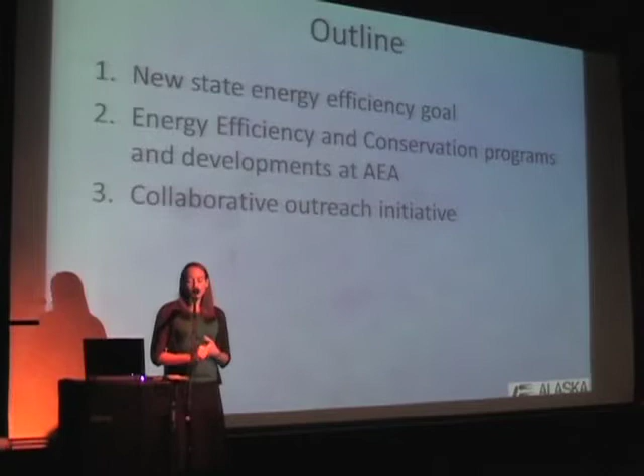So just a couple of things I'm going to go over. My presentation is very short, I promise I'm going to try not to bore you. I want to talk briefly about the new state energy efficiency goal, some of the energy efficiency and conservation programs and developments at AEA, and a new collaborative outreach initiative that we're actually right in the middle of right now.

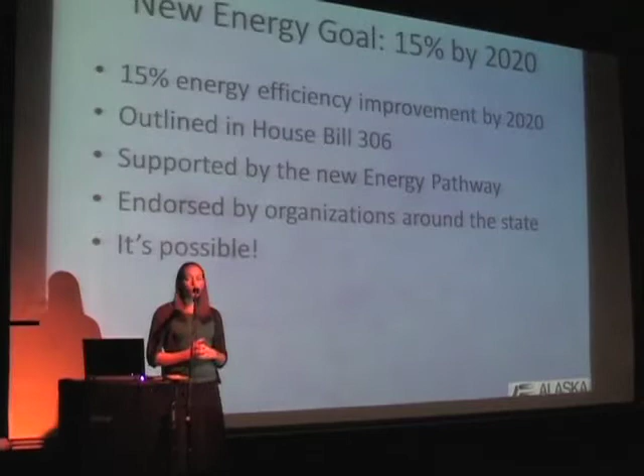As you probably are aware, this past spring our legislature passed a new goal in House Bill 306 to improve the state of energy efficiency in Alaska by 15% in the next 10 years. The governor signed this into law, and it's been supported by a document you might be familiar with called the Energy Pathway. This is something our executive director, Steve Haagenson, and a whole slew of people put together, and if you're interested in the pathway, you can find it on the AEA website.

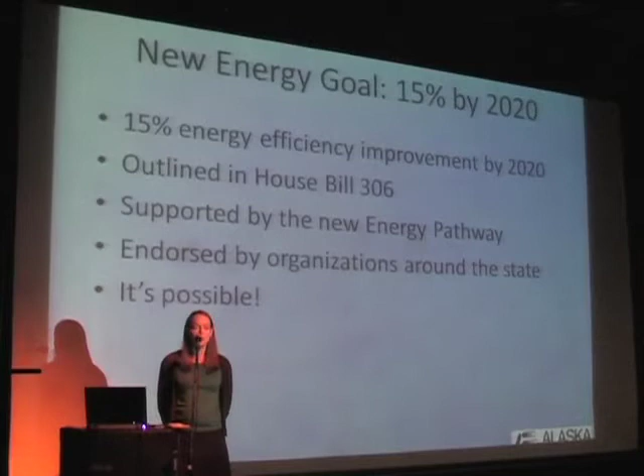And now the goal has been endorsed by organizations all around the state through a group called the Energy Efficiency and Conservation Working Group. We all believe it is possible to make this improvement, to reach this 15% goal, and if anything, that might be an understatement, that we could actually do better than that.

The first set of programs I'll mention are the Small City Energy Efficiency and Conservation Block Grants and the Village Energy Efficiency Program. These are sister programs, very similar, but they come from different sources of money, so they're separate. The EECBG program serves about 97 small cities in Alaska, and the VEEP program has 21 villages in the state. Combined, that's about $8 million. They're both stimulus-funded programs, and the intention is to weatherize and retrofit public buildings in these communities to help lower the cost of energy.

Before I move on to some of the other programs, I'll mention one I forgot to put a slide in for. You might have heard of the Whole Village Retrofit program. That was a collaborative effort by a long list of organizations, including AEA. I don't want to go into that now, the list is too long and I don't know if I'd remember everybody. But that was a pilot project done in the community of Nightmute. It was very successful, and we'll be doing three more communities next year: Emmonak, Alakanuk, and Fort Yukon. We don't have a lot of information about those yet because the decision about where to do the next round was just made recently.

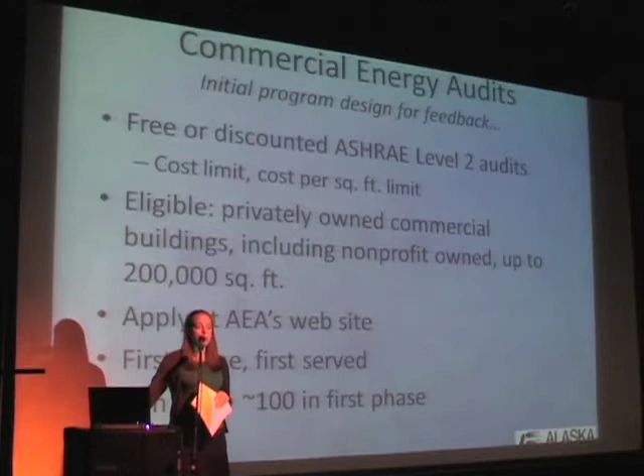So if that's something you're interested in, keep your eyes on our website. I'm guessing it'll be pretty close to the end of the year that it actually comes out. One of the things we'll be looking for is getting the data back, so we can use that as part of a collaborative effort to gather data about energy use in the state and track that, again looking toward this 15% goal.

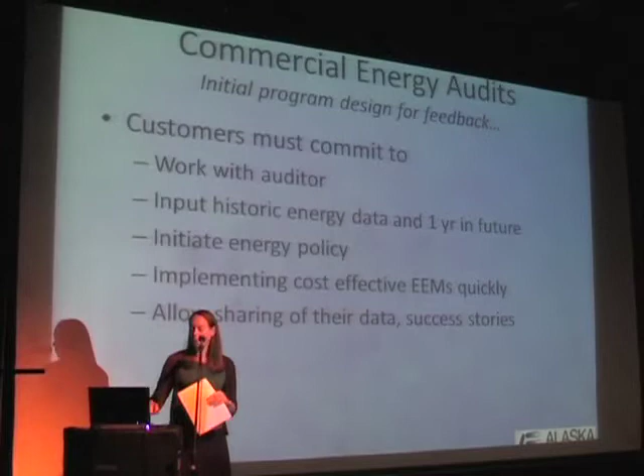Another program that's pretty interesting at AEA is a pilot project for industrial energy efficiency, just within the seafood processing plant sector. So it's a pretty small niche, but it has proven to be successful. I think there have been two seafood processing plants audited so far, both in Cordova, and the community is proud of what's been done. We're very optimistic this could turn into something bigger eventually, but it's just nice that we have something in the industrial sector.

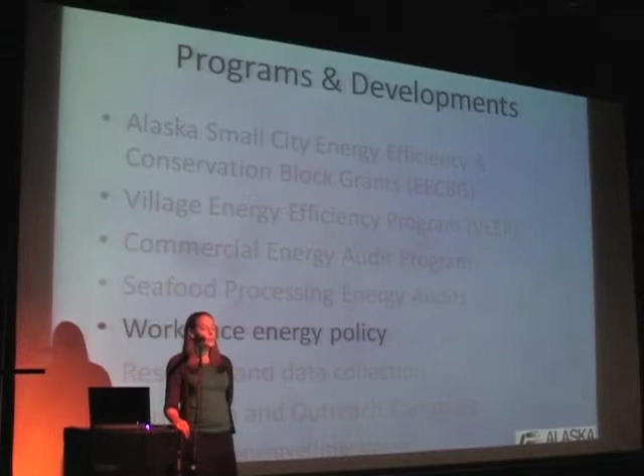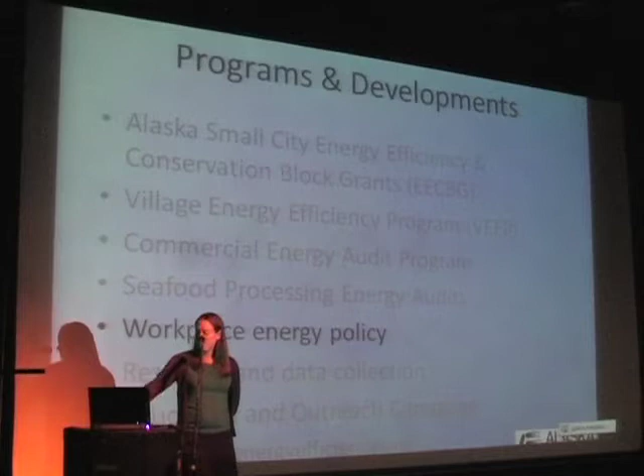The workplace energy stuff doesn't really fit in with home weatherization, but if you care about energy efficiency in your home, maybe you'd like to do something in your workplace. This is something we've done at AEA. We have a very, very inefficient building in Anchorage, and...

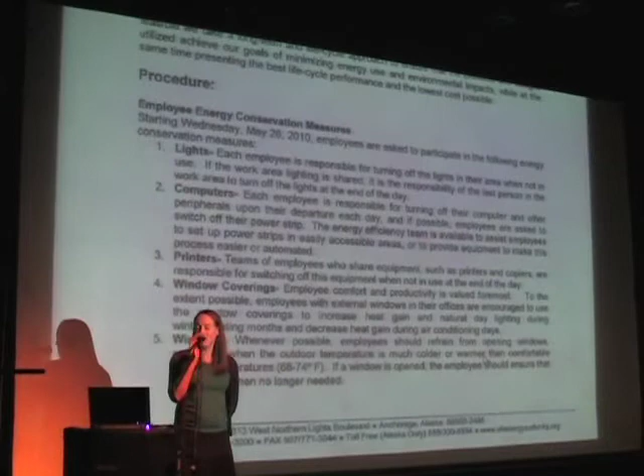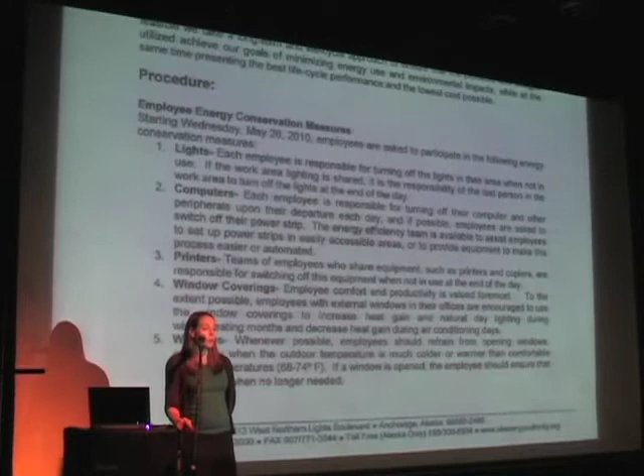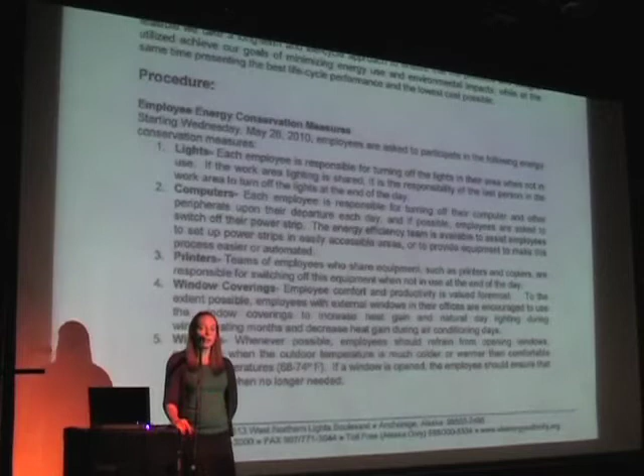Okay, we're back on track. We implemented a building-wide energy policy right after the fiscal year, and it's really straightforward, a bunch of the no-brainer measures you'd expect people to take anyway, but most of us are lazy and just don't do, things like turning off our computers or putting them on power strips we can flip off at the end of the night, and putting our copy machines on timers.

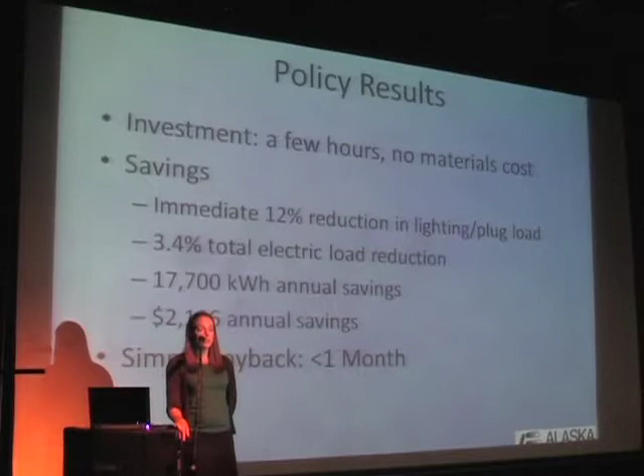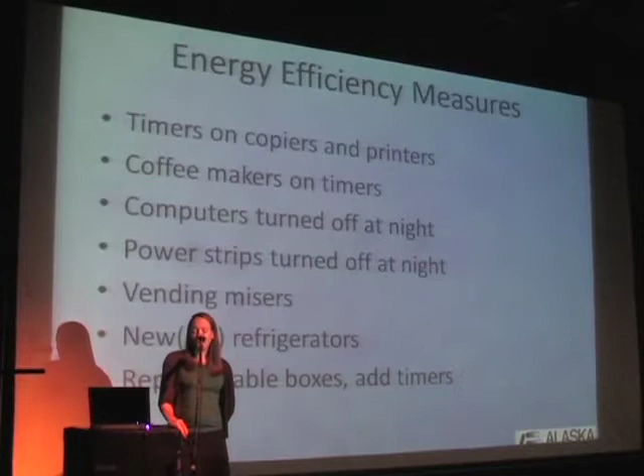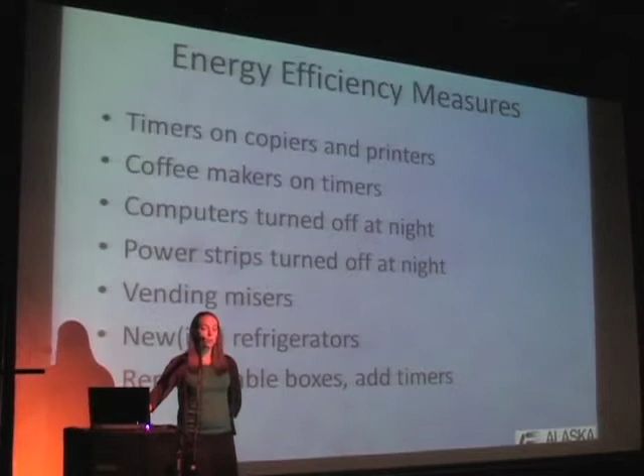The policy results, which we have a map of, showed a really simple payback and some pretty significant annual savings. Looking at the different measures taken over the course of the summer and into fall, like power strips turned off at night, computers turned off, and putting our coffee makers on timers, that was a surprising one, most of those industrial coffee makers are on 24/7. We also looked at some of the other refrigerators, making sure we don't have completely archaic ones, we have the newest ones possible. We're saving a lot of money, and this is something anybody can do in your business.

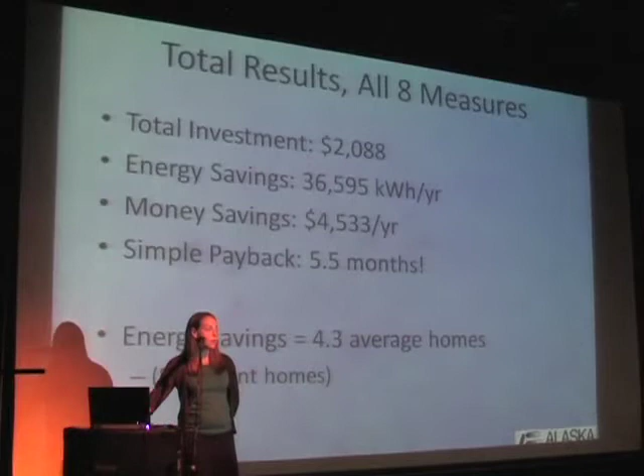I know that businesses care about the bottom line. If you're interested in this, you can find it on our website, and it would be a very simple template to use in your workplace if you're interested.

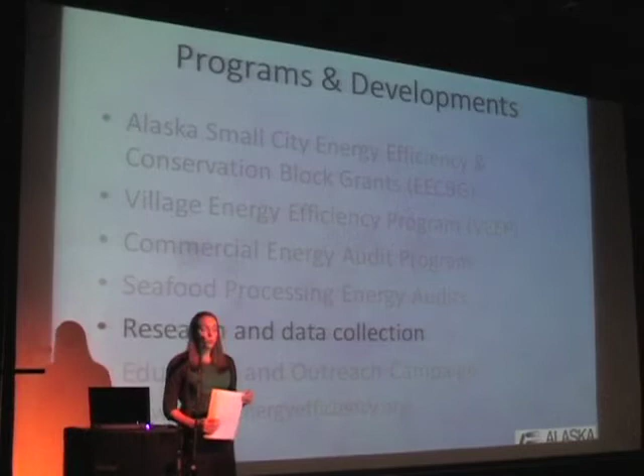So one more piece - this is all new things that will be happening soon. Research and data collection, this is actually part of a grant that AEA wrote on behalf of this statewide stakeholders group earlier in the summer, and we just recently found out we had received it. It'll fund a lot of what I'd call critical information gaps, like a statewide end-use data study. If we want to work toward a 15% goal, it'd be great to know exactly where we are now, so we can measure progress as we move forward.

It will fund a statewide needs assessment for improving energy efficiency, and compare that to a study of best practices for energy efficiency education and outreach outside Alaska, so we can have a more targeted, effective strategy for reaching the public, which I think is great. And then revisiting a policy and program recommendations report done two years ago that's been used a lot, particularly by our legislature. Most of the legislation passed this spring in Senate Bill 220 and House Bill 306 came from recommendations initially in the first version of this report, so now it's time to do another one.

And finally, my favorite part, the education and outreach campaign at AEA, including a new website. This is where it might tie in with what you came here tonight to hear about. This Energy Efficiency and Conservation Working Group is a large and growing body of over 30 organizations around the state, including ACEP, AHFC, CCHRC, and a long list of acronyms I won't bore you with now. We came together to coordinate our efforts and agreed that this 15% goal is achievable, and it will work better for all of us if we do it together.

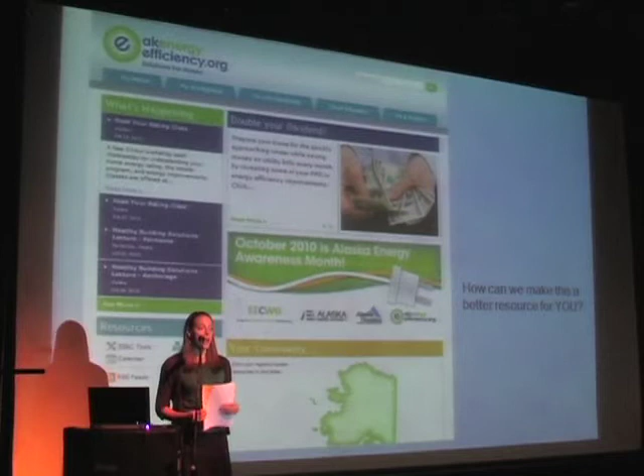And finally, this brings us to one of the reasons we might be here tonight, and that's because October is Energy Awareness Month. Here's a quick look at our website. Again, if you haven't been here before, or you have and haven't given it much thought, please go to it when you have a chance and send us an email. Let me know what you think needs to be added, or if you have any positive or negative feedback. We really want this to be a place that Alaskans can use as a first point of contact into the universe of energy efficiency in Alaska.

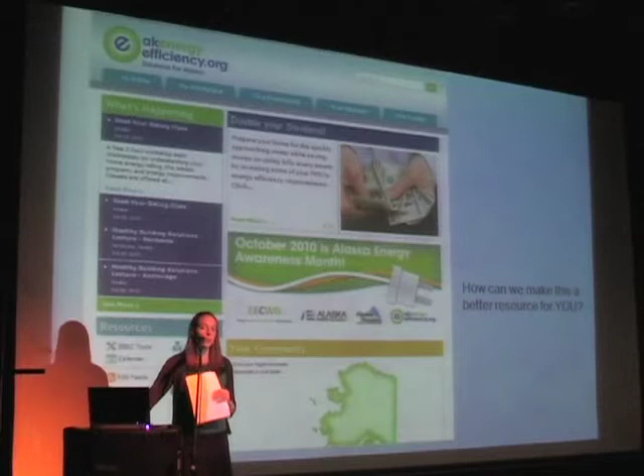It's a heavily link-based site, so odds are if you start here, you'll end up somewhere else, but if you keep returning here, you'll never run out of places to go to find what you need.

For Energy Awareness Month, even though it's getting toward the end of October, if you're interested in a poster for your workplace, your kid's school, or tip sheets you can use or pass on to a friend, neighbor, or coworker, there's a bunch by the door. Please feel free to take as many as you like on the way out.

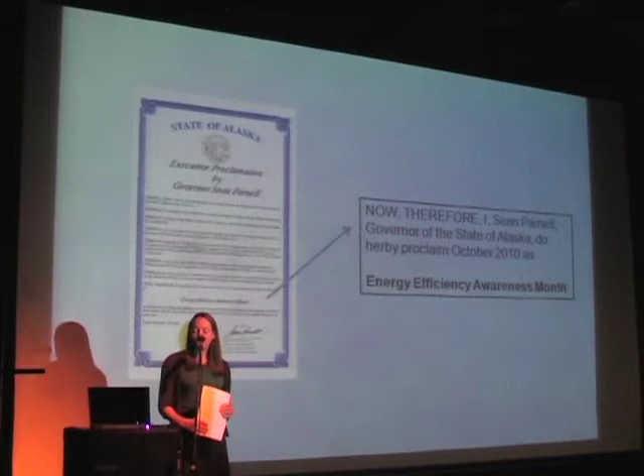And this is from the proclamation. The governor didn't make a big deal about this, but he did indeed sign a proclamation making October 2010 Alaska Energy Efficiency Awareness Month.

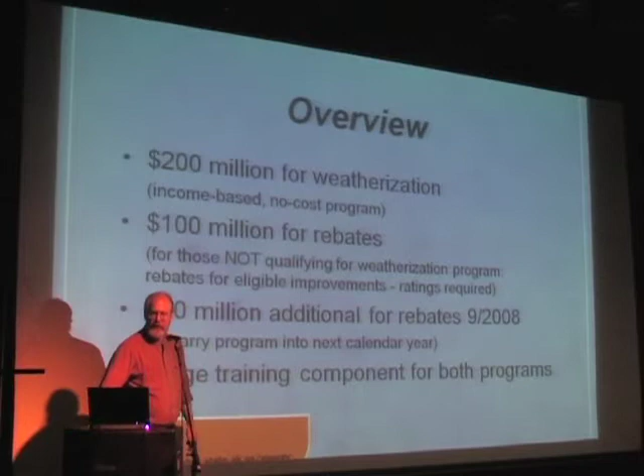We've been working the last couple of years rather busily on some weatherization and home energy rebate programs. I'll give a quick update. The weatherization program got funded a couple of years ago at $200 million, and then $100 million for rebates. There was an additional $60 million tied in September of 2008. To date, most of that money has been encumbered, though not all spent. There's still some money left, but most of it has been committed.

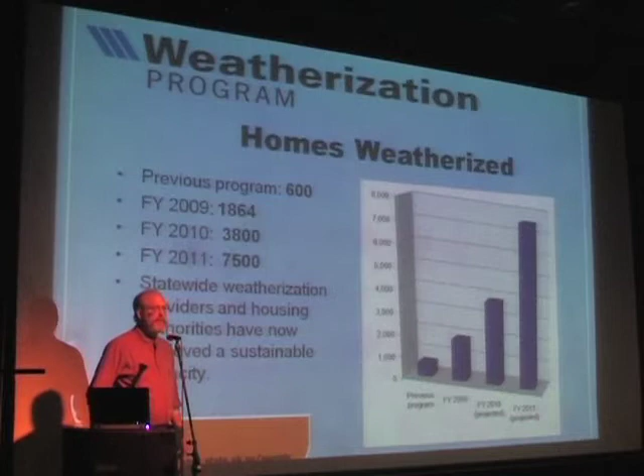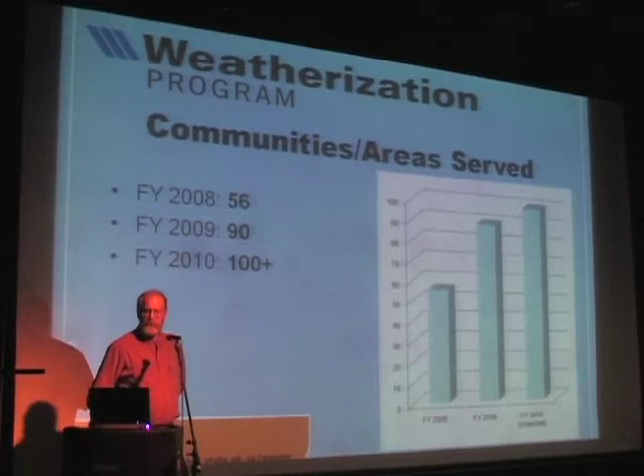The weatherization program is a low-income program that provides grants for low-income people in Alaska to weatherize their homes. In previous years it averaged about 600 homes per year. In FY 2009 there were 1,864, with 3,800 projected this year, and 7,500 next year. We've reached over 100 communities in the last 2 years, where previously we used to do about 56 communities. So that's increased pretty dramatically.

On the rebate side, all of the funds have been fully encumbered. As you may be aware, the rebate program gives you an as-is energy rating, then you do the work from the list of improvements offered, and then you get a post-energy rating. You have 18 months to do the work and get your post rating and paperwork turned in for the rebate. That money has been fully encumbered, but only about 65% of people who got an as-is rating are actually following through and getting a post rating. So that 35% who haven't followed through, that money is returning to the pot and rolling over.

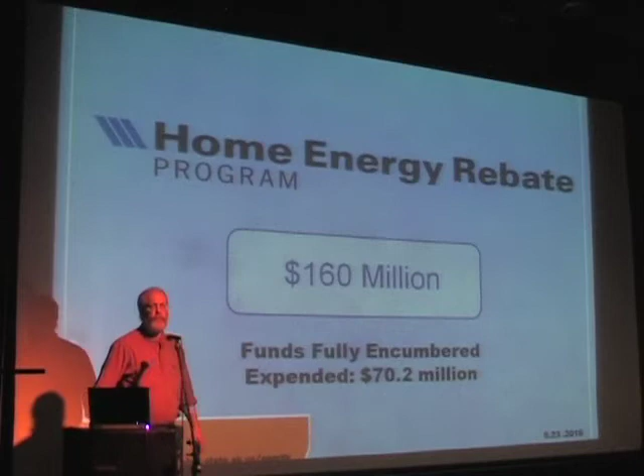We're still releasing about 400 names per month to get the home energy rebate as-is rating done. On the rating side, there have been just under 9,000 rebates paid so far, averaging just over $6,200 a month, with about a 63% participation rate.

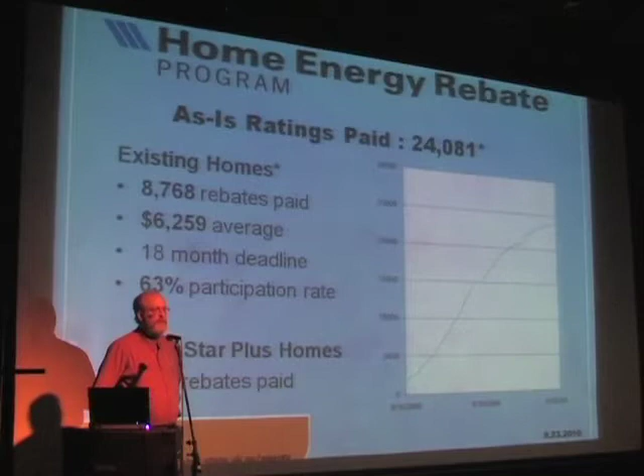There have been 834 new 5-star plus homes built in the last 2 years. The number of raters has increased fairly dramatically. At one point we were a little short on raters, and in late 2008, early 2009, there was a long wait list of over 10,000 people. That dropped to under 1,000 by the end of 2009, and because the money was fully encumbered at that point, the wait list has been slowly climbing since and is now just under 4,000.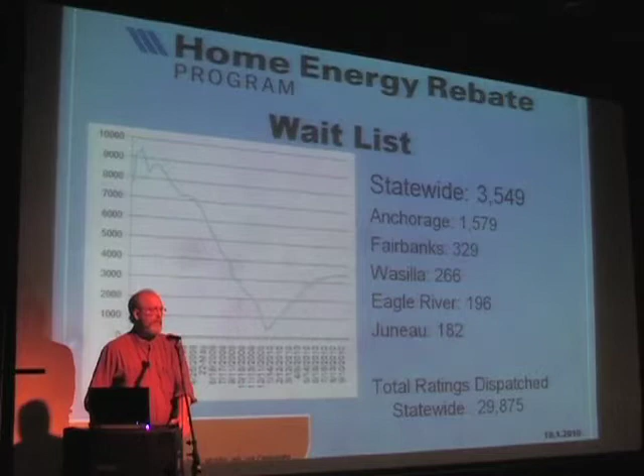There are about 325 people here in Fairbanks on the wait list right now. But we've dispatched just under 30,000 as-is ratings in the last 2 years, which is fairly impressive given that in the previous 12 years we had about 25,000 energy ratings done statewide.

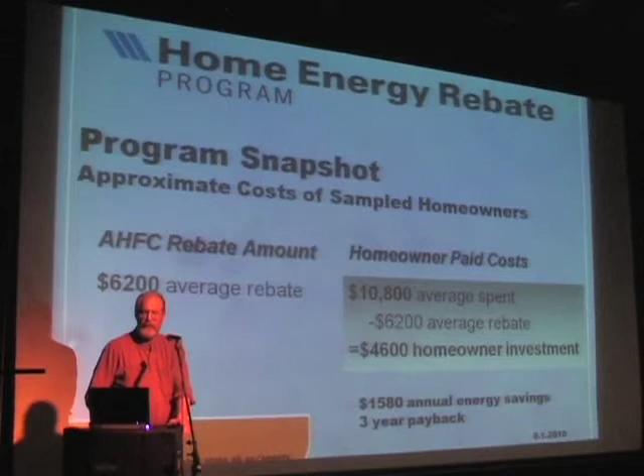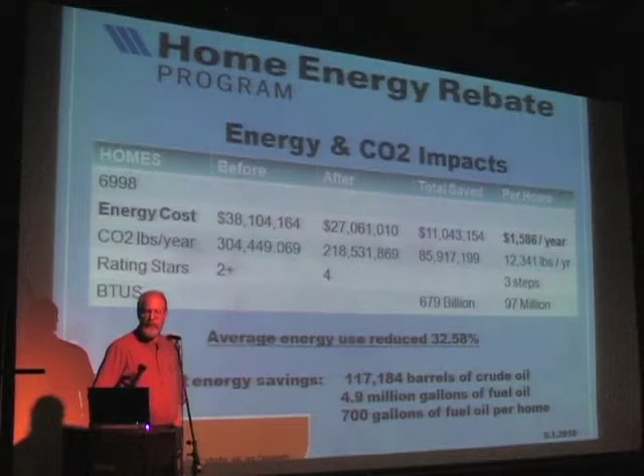On average, homeowners have been spending about $10,800, getting a $6,200 rebate, for about a $4,600 investment out of their own pocket. Energy savings have averaged about $1,586 a year, with over 12,000 pounds of CO2 reduced per home. Average improvement has been 3 steps, and it's moving along fairly well.

This is just a quick snapshot of the average savings by fuel type. You can see the different savings there, and that's based on just under 7,000 homes.

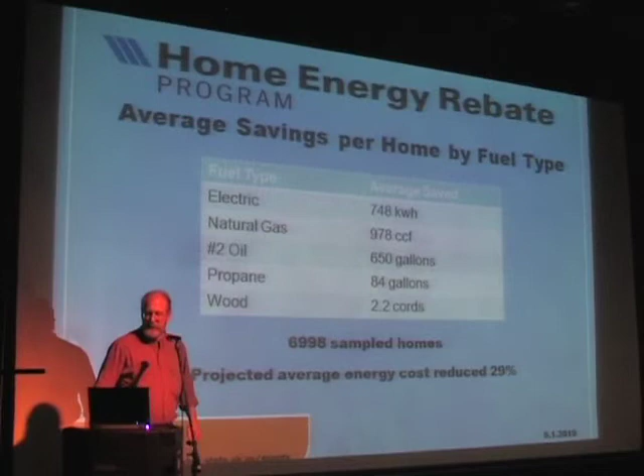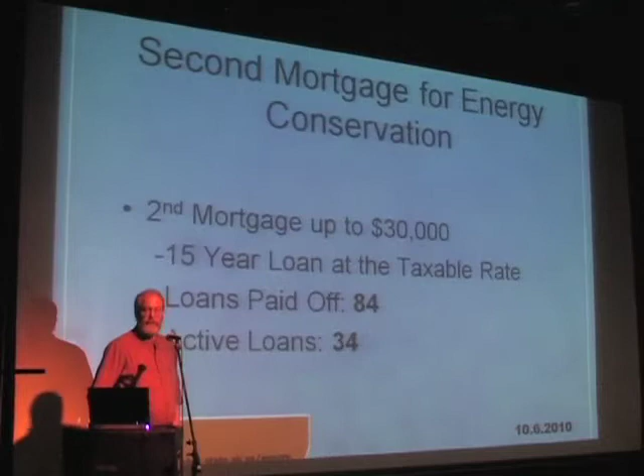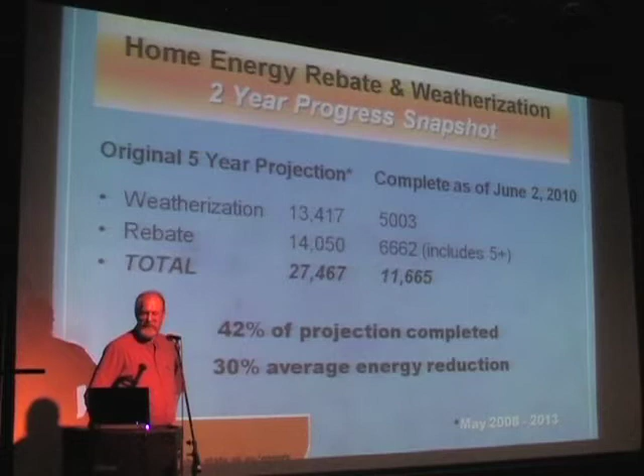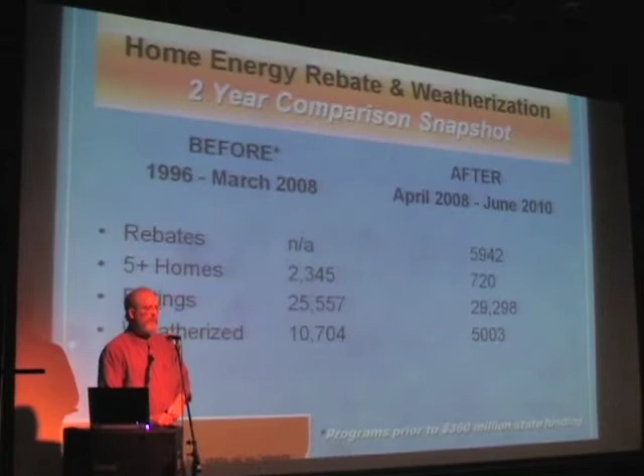Here are some before and after comparisons of what's been happening. Before, from 1996 to March 2008, a 12-year period, there were 2,300 5-star plus homes. There have been 720 more as of June. Previous ratings over 12 years totaled what we've now done in the last 2 years alone, 29,000. Weatherization in the previous 12 years was 10,000 homes; in the last 2 years we've done over 5,000. So a lot has been happening fairly quickly, and it's really moving right along.

A couple other things going on: AHFC is designated as the State Energy Office, so we're the recipient of all the energy efficiency funds for Alaska, including the Energy Efficiency Conservation Block Grant Program, which Katie mentioned. AEA is managing part of that project in the Village Energy Efficiency Program, and they're also doing some waste heat recovery. We've got money here with CCHRC for sustainable northern communities, which Ryan will probably touch on, building energy efficiency standards, and improvements to AkWarm and the database behind it, which is the software that the weatherization program and the home energy rebate program use.

And then we're just embarking with the retrofit for public facilities. We've got a revolving loan fund that's been established, and we're about to launch that. And we have a couple $150 million to start retrofitting public buildings across the state.

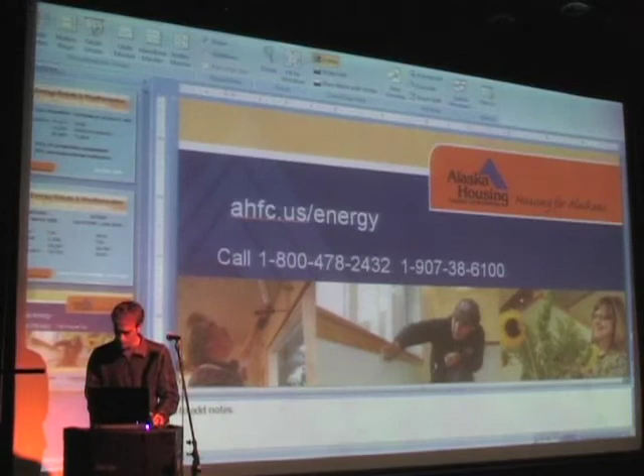My name is Todd Van Osdal. I'm with Interior Weatherization, the technical manager at our office. I'm in charge of all aspects of assessments and inspections for our company. I also go out and do the assessments myself, determine what sorts of improvement options are available for the houses and what measures can be done.

I'll start off by giving a little background about what the weatherization program is, then move into how people qualify, and talk a little bit about some of the work that we do and things like that.

Interior Weatherization was incorporated as a nonprofit in 1985, so we've been in the interior area for quite a while, and we've been around town. We've been a lot more visible lately, as Scott was mentioning, with the increased amount of work that we're doing.

Just a couple of years ago, we were doing about 200 homes a year. This year, we're slated to do just about 500 homes. So we've really expanded a lot in the last couple of years, in part due to more attention and investment in energy efficiency and conservation.

We receive most of our funding at this point through Alaska Housing Finance Corporation and through the state of Alaska, through the legislature. But we also receive some grants from the U.S. Department of Energy and the federal government as well.

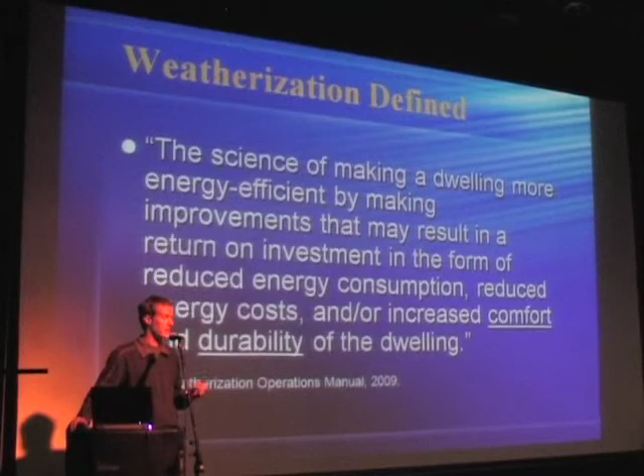So the first part of that obviously places emphasis on energy efficiency and conservation and looking for cost-effective measures. They're going to involve some sort of return on investment, some sort of payback, a bigger bang for the buck. And that all seems pretty straightforward until you get to the latter part of the definition, those last two little words: comfort and durability. Those two words are really important in separating weatherization from just straight building energy efficiency. I'll get into why comfort and durability complicate what we do in a little bit.

Well, I guess I'll do it now. The main reason why comfort and durability make our jobs a little more complicated is because weatherization looks at the whole house as a system. We don't just look at the shell, the doors and the windows, the insulation, your attic or your foundation. We don't just look at changing the behavior of the occupants. We don't just look at the mechanical systems, the heating systems, and the ventilation. We look at it as a system that should operate as a whole.

And the difference between a building and a house is a structure that performs as a livable dwelling. So it's kind of like a triangle. A triangle is a very strong structure when you have all the points equal. And if you have any one of those points lacking, the structure collapses.

Or you can have a building that is very well insulated, has very energy conscious clients, but the mechanical systems don't work quite well. So in order to get the whole system to work, weatherization focuses on all three of these fronts.

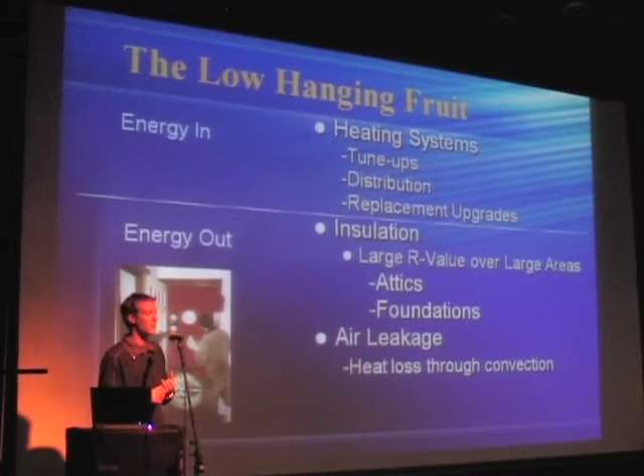And that's more focused on the energy input side of things. So we're looking at improving the efficiency of our inputs. The rest of weatherization deals more with the efficiency of our energy outputs and the energy going out of our building shell. So we deal more with insulation in areas where we can affect a large square footage with a large amount of R value at the same time for the lowest cost. And the areas where we typically find that we can add the most R value for the cheapest cost over a large square footage are typically our foundations and our attics. So we focus a lot on those areas.

We also deal a lot with air leakage. We run blower door tests to assess the houses for air leakage and look for savings in that as well. So there's some pretty typical areas where we find a lot of low-hanging fruit.

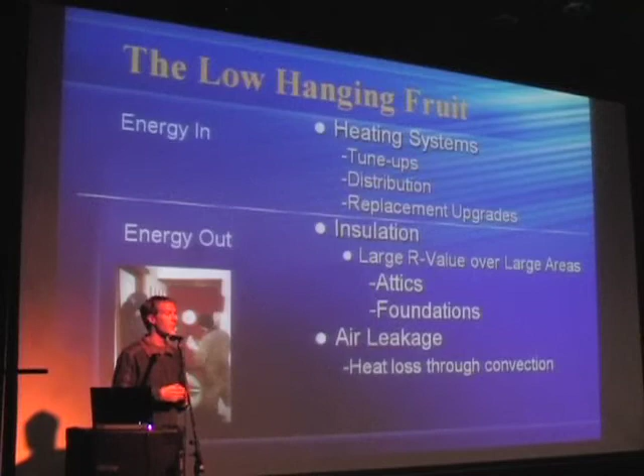And one thing that I should mention is the big energy savings that we tend to find in these older homes isn't isolated to these older homes. We're still seeing it in homes that were built as recently as 5 years ago or less. So one thing that is helpful about these lectures is that people can get educated in making homes that perform better, that are more efficient, are healthier, and more durable. So it's an ongoing process. It's not a problem that we've particularly solved, even with new construction.

And so after you've identified certain kinds of cost-effective improvements and identified a certain amount of savings, the next thing is how do you address those areas? How do you install the improvements in a way that actually performs and gets you the savings that you're hoping to expect? For that reason, I want to go over this little diagram here.

One thing that's really interesting is this example of an attic that's 1,000 square feet, so 25 by 40 feet. If I were to go into that attic and insulate it, and let's say I insulated half of the attic, the center, with R100 - that's over 2 feet of cellulose insulation. And let's say I didn't insulate the outside 6 feet on either side, left it bare, just sheetrock, an R value of about 1 or so. So I've got an R value of about 100 on half of the attic and an R value of about 1 on the other side. The question I would ask is, what's my overall effective R value in my attic?

Conventional wisdom might tell us, well, half the attic's insulated, half's not, so we just average it - add the R values together, divide by 2, should get us an average R value of about 50. But heat loss doesn't really work that way in our houses. Heat loss is dynamic, and it wants to follow the path of least resistance. So when you actually do the calculation, converting R values to U values to get a measure of conductance, your effective R value ends up being about an R2. So when you thought you added about R100 to half your attic and said, that's good enough, I've got an R50 now - it's really not performing at that level.

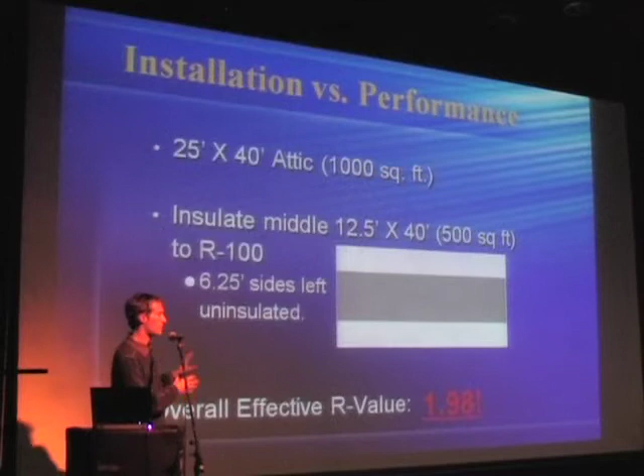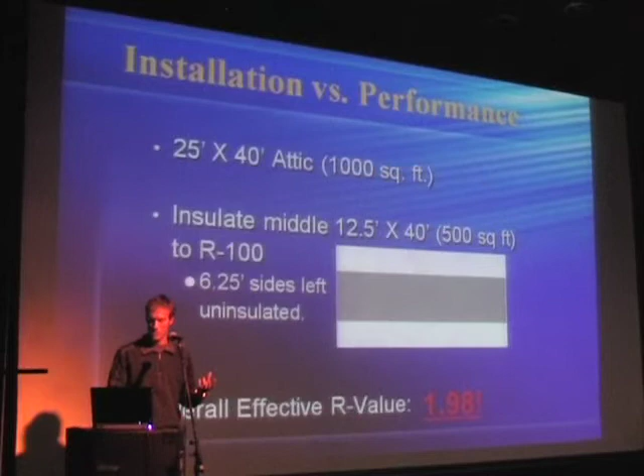Now this is a pretty extreme case - a failure of performance despite a successful installation. But it's not too hard to imagine a case where, let's say, you paid me to insulate your attic up to R100, and I said sure, I'll add 26 inches of cellulose. But let's say I was lazy, my back was hurting that day, and I insulated right down the middle but didn't get quite out to the eaves, leaving a 1-foot strip uninsulated on either side, saying I couldn't get to that area, it was too tight. So if I left a 1-foot strip on either side uninsulated - about 80 square feet, or about 8% of the overall ceiling square footage - how does that affect my overall R value or the performance of the insulation I installed?

It's actually pretty surprising. You add R100 of cellulose to the attic - that's a lot of cellulose. You think you have R100, but really you're only performing at about R11, which is pretty minimal for our climate. So this is just a demonstration that when we identify certain energy measures, that's really only half the battle. The second part is installing it properly, in a way that actually performs and comes back in real savings and real numbers.

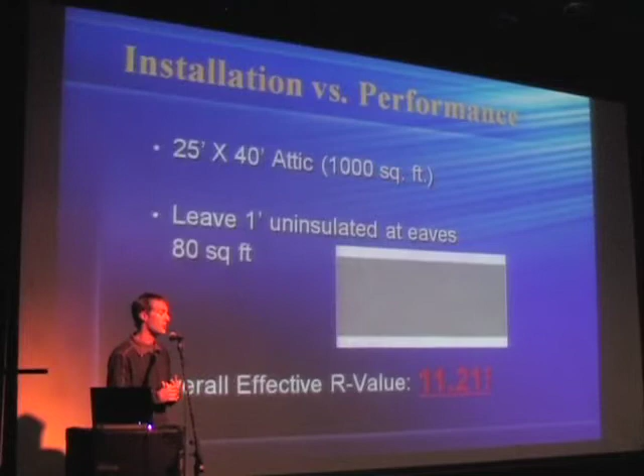That's a lot of what we do in our office - we not only identify the savings, but we try to achieve those savings in a way we think is going to actually work. So we do a lot of quality control and training with our own crews to make sure we're getting those energy savings, hitting those weak spots, because your insulation is really only as good as your weakest spot in your house.

On top of energy efficiency and savings, weatherization is really a package. You can insulate a house and air seal it very tight, but if you don't deal with the whole picture - the house is a system - it doesn't make a lot of sense to air seal a house real tight but ignore the fact that the range hood can overpower my fireplace and pull fumes back into the house. So we're looking at how certain components affect other parts of the house. A lot of times with our energy efficiency package, we may have a certain amount of energy savings potential, but we may need to pay back some of that - say 5% in ventilation costs - to achieve a house that's not only efficient, but healthy and durable as well.

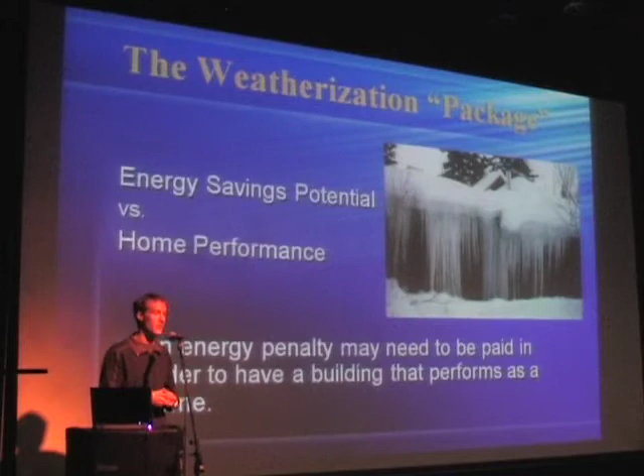So weatherization is kind of unique in our field, in that we're looking at the house as an entire system, whereas your heating contractors are specialists at your heating systems, and they're not going to look at the connection between your range hood and your boiler. Your insulation contractor is not necessarily going to look at the connection between the ventilation and the insulation that they do. So weatherization really takes a whole house approach, which I think is pretty important in getting these houses to work.